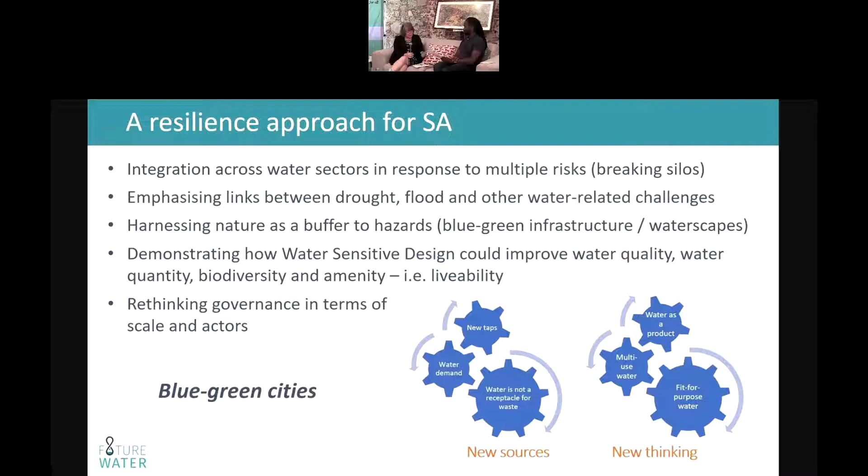Water-sensitive design in this case is the process - we're talking a lot about process today. It's how we put in place the resilience-building initiatives for a water-sensitive city, and the water-sensitive city then becomes your destination. So those processes and the approach of water-sensitive design are things like diversifying water sources, bringing in sustainable drainage elements so that you have that green infrastructure that starts protecting buildings and roofs and roads and that sort of thing.

You have things like naturalization of waterways, using nature-based solutions for the treatment of waste, recycling waste. Even things like water conservation and demand management form part of the approach that is water-sensitive design, because it starts to consider all those different aspects of physical infrastructure, the governance arrangements, which we've heard about from Sebastian already, and obviously social engagement, which is so important.

In a moment, we'll speak to Tamsin Faragher, who's the Principal Resilience Officer at the City of Cape Town. How does academia help the City of Cape Town in realizing a water-sensitive design city?

Yeah, so I think our role - academics have three main roles. One is research, obviously teaching, and the other is what we call engaged scholarship, or sometimes social responsiveness. And it's in that space that we really do have an influence across stakeholders, not only local or national government, it could be in business, industry, with consultants, and with residents. So what our privilege as academics is that we're able to zoom out to a space where we don't have to concern ourselves necessarily with the day-to-day operations and management and even maintenance of this sort of water-sensitive design space.

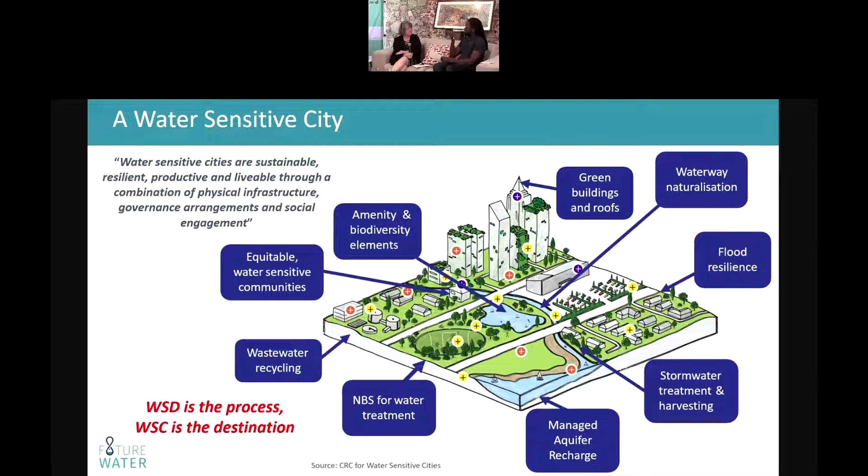The previous public protector, Professor Thuli Madonsela, coined a wonderful term where the primary part of her work was responding to the needs of Gogo Dlamini. She almost instilled that image of an ordinary South African who lives, hopefully pays taxes if they're earning income, has a healthy life, and that kind of thing.

How do we involve the Gogo Dlaminis of this world in this conversation and process? It's really important, and it's not easy, because often government tends to do things in a top-down way, using the regulations, policy and knowledge they have to impose certain ways of doing things. But if we want to transform our cities from where we are at the moment, where they really are only providing water supply, sanitation, and sometimes drainage services, to that more visionary space we call a water-sensitive city, then that point of transition is going to be where people are involved and understand their impact on the water environment, and what impact the water environment has on them.

Without that, we're not going to be able to transition into a more water-sensitive space. So some of the work we're doing as part of Future Water is that we lead a community of practice program in water-sensitive design, with funding through the Water Research Commission, where we build awareness, do a lot of training, knowledge raising, data management, and have websites—we connect with people on a very broad level. But apart from that, that's the training of your average stakeholder, the ones particularly invested in doing water-sensitive design.

I mean, if we recognize, as Kirsty and Tamsin have said, that no settlement, towns, cities, we can't exist or function independently of Earth's natural systems. And so Earth's natural systems, obviously your groundwater, surface water systems, your biotics, your plants, animals, insects, what have you, your climate systems, and many other systems that this is the Earth, this is what we live in. And once you recognize that we are dependent on these natural systems, I think we especially in the last few decades, we've engineered a lot of these systems out of our cities.

And I see in landscape architecture in particular, it's almost retrofitting it back into the landscape, into the urban setting. So you've got things like your stormwater piping, which is a definite engineering to reduce the flooding issues because everything is covered in impermeable surfaces. So the simplest thing is to increase your permeable surfaces at every opportunity. But you're not taking away the stormwater system, you're just trying to now intercept and create infiltration opportunities. These can be big scale, but often they're very small interventions.

For instance, the one that we've got on the screen at the moment is Durham Avenue, which we did. So it's Woodstock, Salt River area. And you know Durham Avenue probably is a fairly broad street. Correct. And the opportunity arose for us to create an intervention. The stormwater before the intervention would just run off to the edge, straight into the stormwater pipes underground. And all we did was, because the parking is at an angle, which is very useful, we could create a portion of that parking space, or the space in front, into a planter, infiltration.

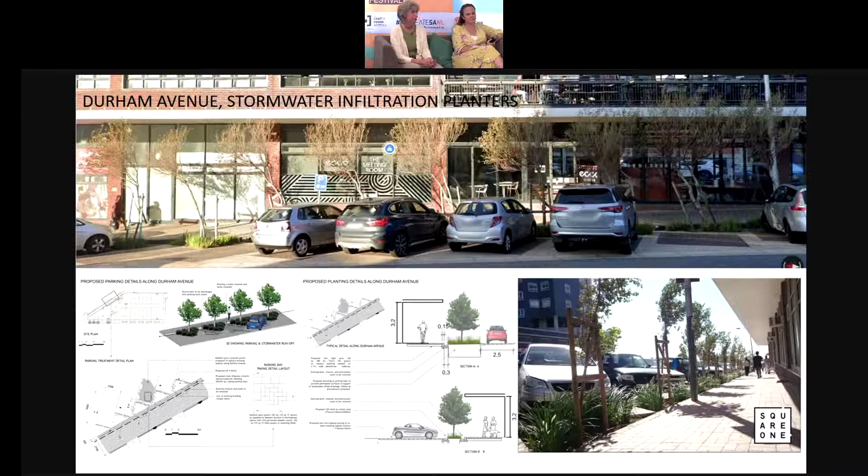Once you communicate your objective and vision, that's got to be very clearly communicated, whether through images or drawings that show ultimately what your vision is. Then you get buy-in, especially when people find out the benefits. It's not just about the water systems, it's about amenity and how it could form enhancing spaces.

One of the projects we did was this Woodbridge Island stormwater infiltration opportunity. The idea was to take the surface water runoff from the car park, a very small intervention with planting, and in the drawings we show a depression. The water would flow off the surface of the car park into these planters and be slowed, filtered, treated, and infiltrate the groundwater. But what was interesting was when the contractor came on board and did it very quickly, we found they'd gone and done a fairly normal planter, which is raised. So it had to be rectified, following the drawings.

What I'm trying to get at is that our everyday vocabulary does not yet reflect a general understanding of these systems. To most people, stormwater systems, as my colleagues have mentioned, are about removing stormwater as rapidly as possible from a settlement. That's becoming a challenge. But I think gradually, through demonstration projects and something as simple as signage to illustrate, those things can help.

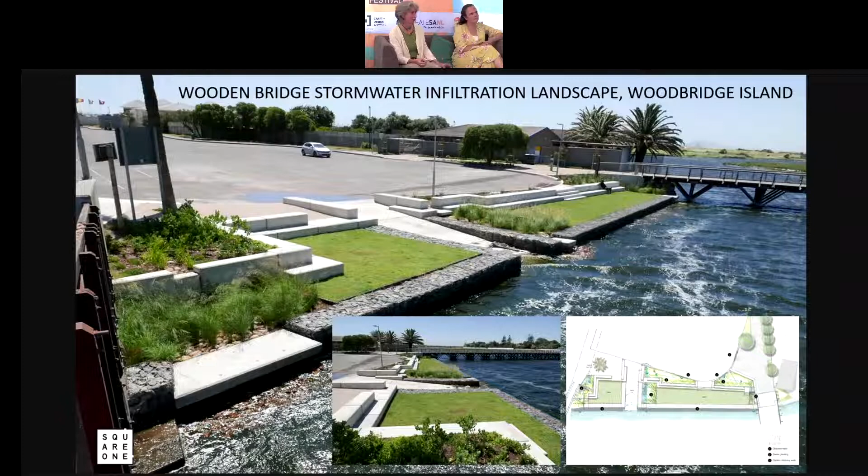You mentioned Durham Street in Salt River, and of course Woodbridge, the stormwater infiltration project. Are there any other examples of success coming from the sector? Globally there are many, but I'm trying to focus on local projects. The numbers are growing in South Africa, but one I'm most familiar with, and Tamsin works nearby, is the Standard Bank Towers.

It was an addition to an existing building, with a large plaza out in front. With this additional car park structure in the center, the idea was to integrate the building and the landscape. So the new building is intercepting rainwater, catching it and harvesting it in tanks at different levels. But any overflow, because you're going to have significant storm events, goes into an infiltration basin. So the planter isn't a raised planter, it's a depressed planter. With this blue-green approach, you're reducing the pressure on the stormwater system, but you're also infiltrating the ground to recharge the groundwater.

But it's not just about water systems, it's about water systems as space. In this area, we took the opportunity to include spaces where people could gather, sit, have lunch, meet friends, and so on.

That's pretty, it really is. I like having coffee there. I walk it often because I go to the Artscape Theatre Centre quite a bit. I know a number of people who work at the City of Cape Town, and that's literally our meeting spot almost all the time.

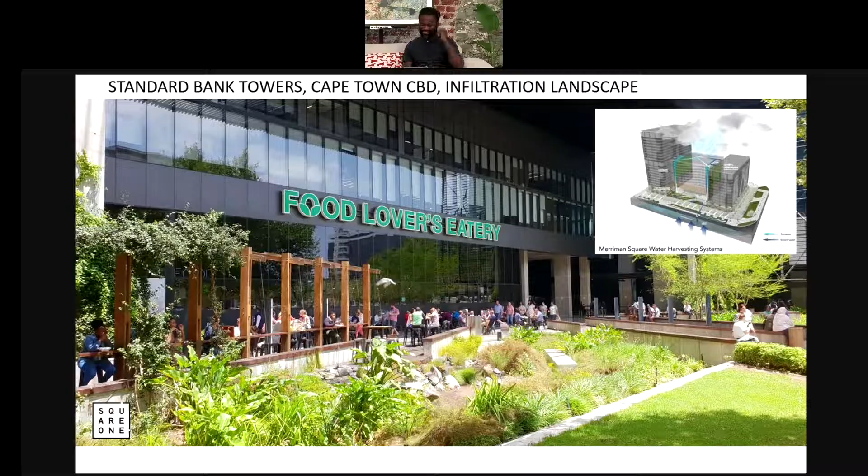Let's move beyond just the City of Cape Town, and more globally, particularly on the African continent, how do we translate many of our African cities into water-sensitive cities, do you think?

I'm not sure I can answer that very easily, but I think certainly from a landscape architect's perspective, it's the traditional view we've had over decades of stormwater being piped. We have to change our minds from stormwater being discharged as rapidly as possible, to one where stormwater is an asset, a resource.

So how do we do that? There are so many examples. I'm referencing places like Benin City, going back to the 1500s, 1400s. There was rainfall there, but what did they do? They had courtyard houses where they created wells that would intercept water. Simple interventions that don't require piping, obviously checking you don't have much contamination.

One of the most beautiful spatial typologies, sorry, getting architectural, is the stepped wells of India. We were talking earlier about innovation. Something as simple as an inverted step pyramid going into the ground to access groundwater, which would fluctuate seasonally depending on the season. These spaces have been designed, they've been crafted.

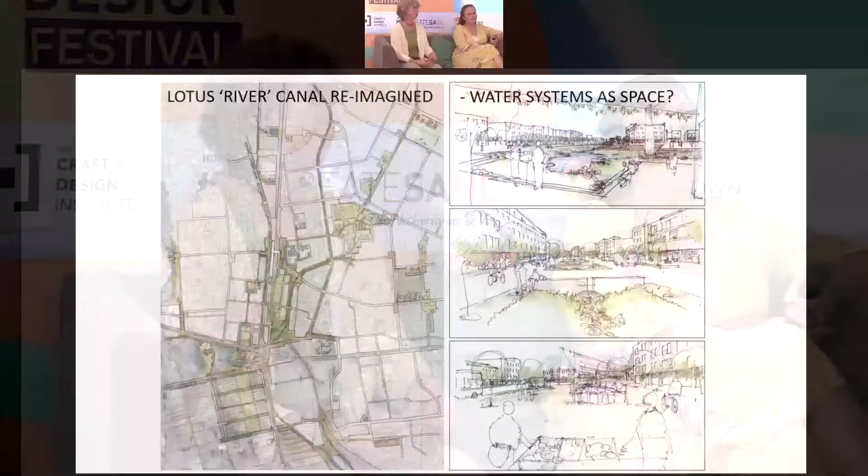But what if we could have the Lotus River Canal, essentially a large stormwater channel that drains water from Cape Town International? What if we could articulate water systems as urban space, as food production opportunities, as sacred space, as recreation and amenity?

Rather than, at the moment, what we have is we've turned our backs on them, and we don't see the value. But if it's just about realizing those opportunities these systems can provide, I think there are ideas and innovations across Africa. If you look at some of the projects going on, sometimes it's about learning from the past.

That would be helpful. Very much. I'm going to throw one more question to you, which I didn't prepare you for, I'm afraid. Yay.

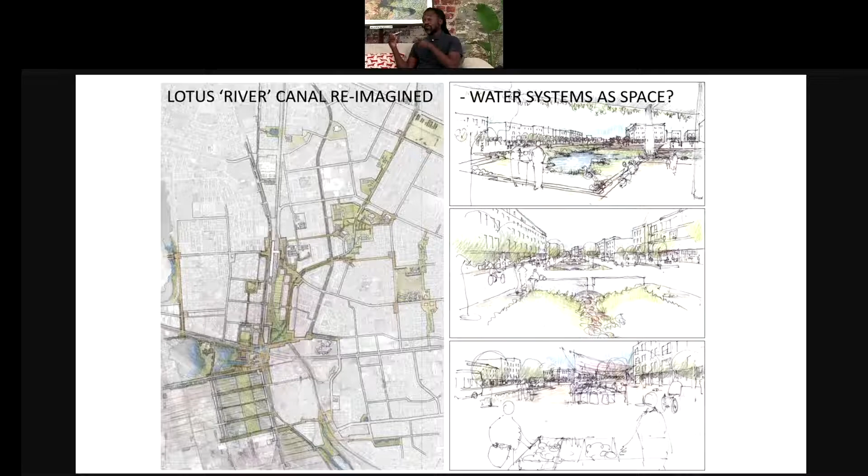When we were thinking about energy and how we can reimagine spaces we consume in an energy efficient way, the early adopters were paying an exorbitant amount of money to bring in this innovation and technology. The more people took it up, the more cost sensitive it became. People would look at that and think it might cost them a ridiculous amount of money. But it sounds like the small interventions you're talking about won't cost an arm and a leg, it's about rethinking and reusing the budget you have to reimagine and repurpose the flow of water.

Yeah, and often it is about talking to clients, developers, city officials, and getting their buy-in. Once you can illustrate, whether through pretty pictures or otherwise, that does help. So there is innovation required in that regard too.

Tamsin, you're excited by this, surely, right? Oh, yeah, it is reimagined though. At least you have one ally, the 26,000 force of the city of Cape Town. Same thing, that's exciting thinking.

It is very exciting. Just to add to what Julia's saying, what it will require, the costing thing has largely balanced out in terms of what you're able to do from a stormwater flood prevention perspective. What can be quite difficult, and it comes back to governance, which we talked about at the very beginning, is how to govern these new systems in an environment that isn't really prepared for them. So maintenance becomes tricky.

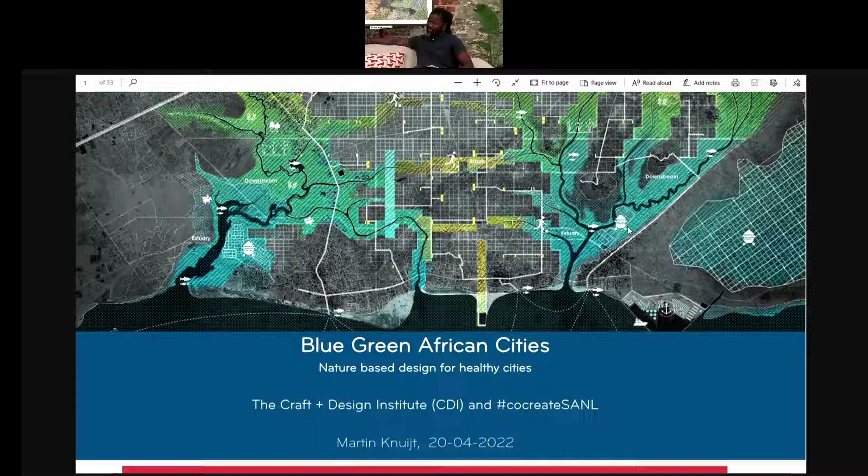I'm happy for you to start showing those examples. You should have the indicator, because I also want to focus on success stories in innovative design in this sector. Well, I hope this is working. It is? It should be, but I'm not really good at operating these machines. So we're still at slide one. Just to tell everybody, we tested all of this before 2 o'clock and it was all working 100%. So as with everything else in life, we're going to blame it on Eskom and load shedding - it's the only reason we're having these challenges that weren't here five minutes before 2 o'clock. No, but it's not about the machine, it's about human error, it's me.

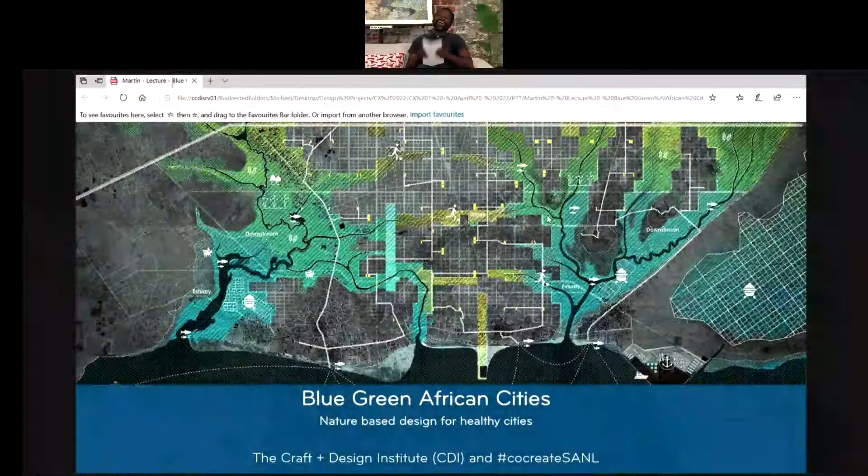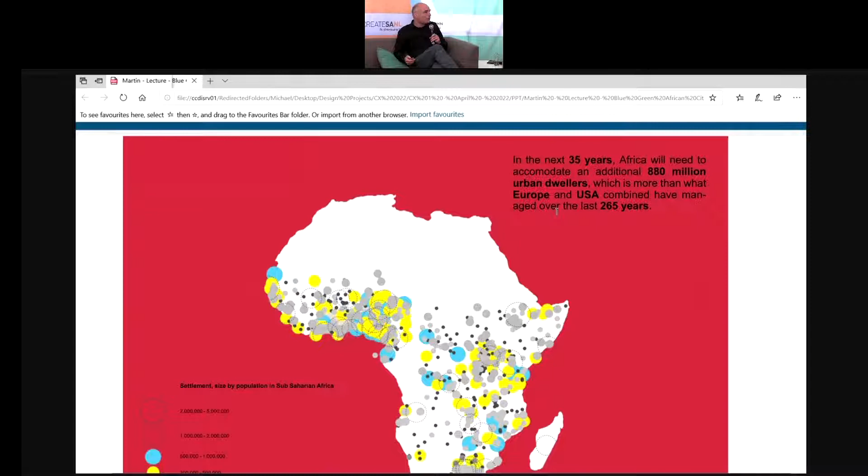Talking about African blue-green cities, I think the challenge in Africa is really massive. If you talk about the expansion of cities, it's more than what Europe and America saw over 265 years that is now at stake. So if we want to create blue-green cities, we need to acknowledge this is the case in the coming years. In Africa there's also a special challenge since 50% of African people live in informal cities, so these nice European examples don't work in many cases - let's say only in half of the cases. There's also a change in the amount of energy and nutrients used when we construct these cities. At this moment, the whole African continent is only consuming the amount of energy that a small country in Europe uses.

And that's an advantage, right - the fact that, unfortunately through socioeconomic challenges, we're consuming minimally? Yes, in fact that might help find appropriate solutions. Once you acknowledge this is the fact, and that there's an opportunity and not just a threat, this might lead to innovative solutions coming from Africa that Europeans can learn from. I think that will be the case in the next decades.

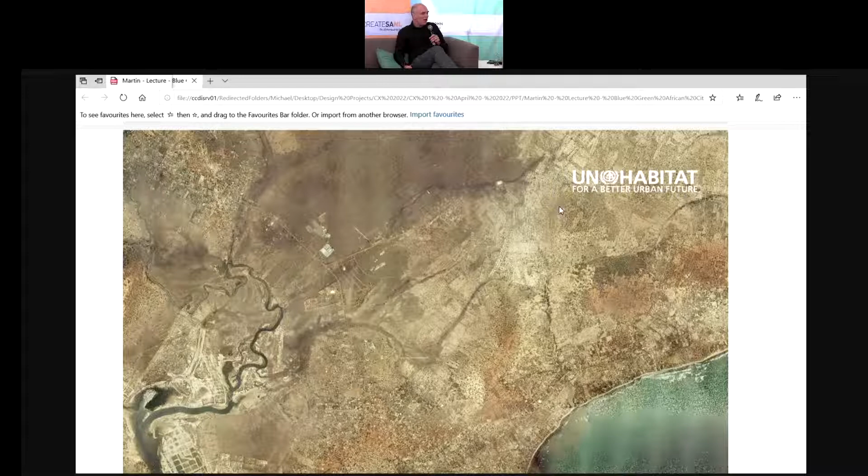And the idea was that it should tackle some problems with flooding. Now you have today the really terrible situation at Durban, but in Accra it's happening every year. Let's say 20 years ago it was every 3 years, so it's occurring more often.

And once these floods take place, there's also fires because the infrastructure is collapsing. And if you talk about social aspects, the poor suffer the most. So it's almost incredible that you see this picture, because it is happening in areas where people don't have a thing.

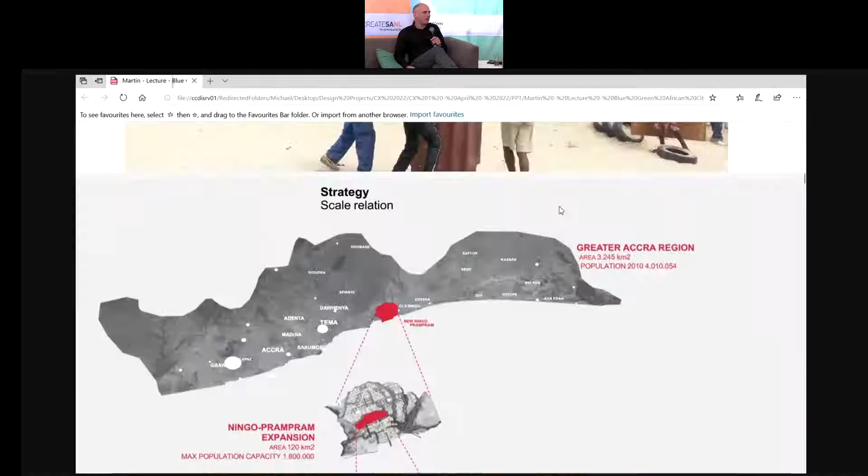Well, that was a reality for us in Cape Town this past weekend, where the official figures now are 767 people were displaced as a result of a fire that took place in an informal settlement called Joe Slovo, which is literally less than 10 kilometers away from where we're sitting right now.

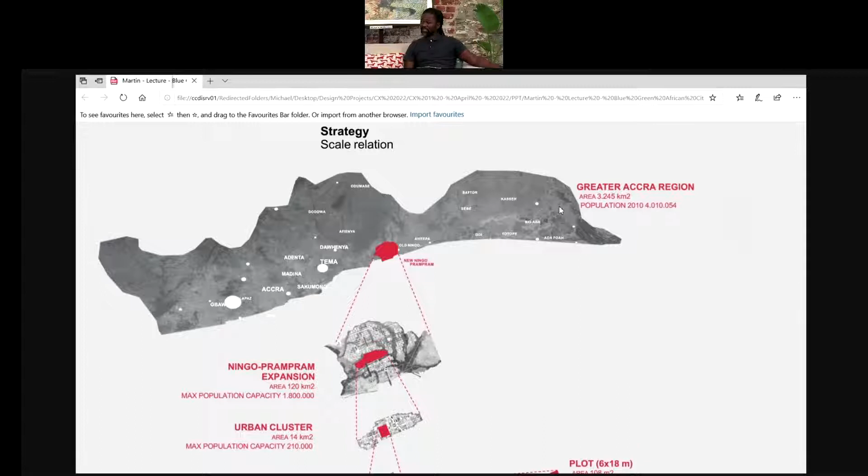Yeah, and in fact it's also related to flooding. So you think it's a fire, but in this case all the infrastructure is damaged, the underground infrastructure, and then a gas leak or a pump station or something else might happen, and then suddenly you have a fire as well. So it's an accumulation of threats taking place.

Now I'll bring you to the area. It's called Ningo Prampram. It's just open land, but if you look at it on the map, you would say it's almost flat. But in this case, it looks a little bit like the Cape Flats.

So we decided that you should not make a grid like the people from UN Habitat usually like to propose, but we said, well, let's start with greening. So couldn't we create green spaces along these rivers, watersheds, and what you call in Northern Africa wadis—which is, let's say, a potential biosphere.

And then if you talk about the informal settlements that will occur—of course, even in the planned city it will occur—then you need to think about what could be a potential programming of these green spaces. Because it's nice to have green spaces, but if you go to the Cape Flats, green spaces are under threat.

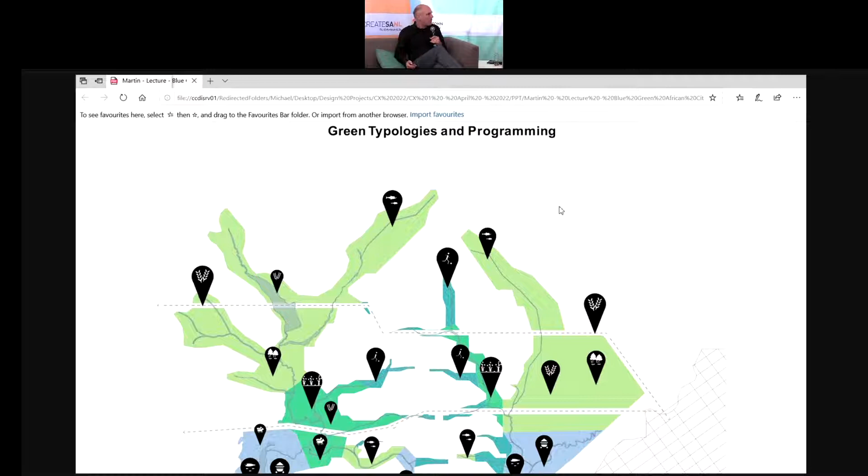So we decided also to make these potential agricultural areas, urban farming, and then work via some typologies on what could you do close by the sea, what could you do a little bit more downstream, and what could you do upstream, because the situations are different.

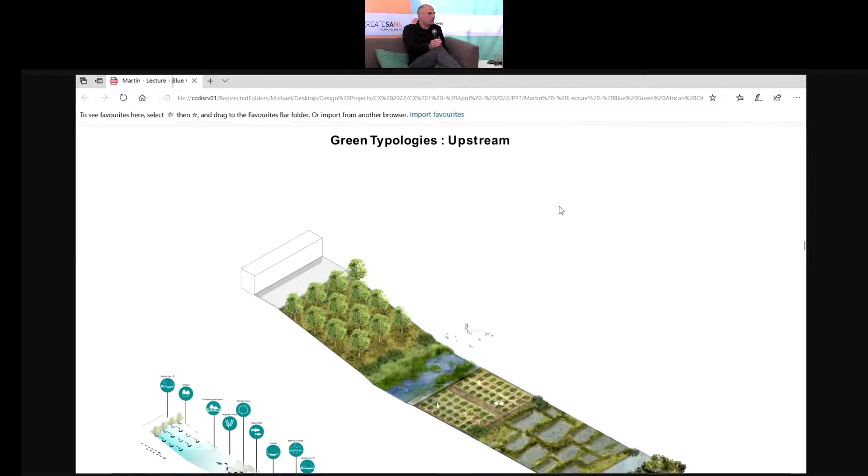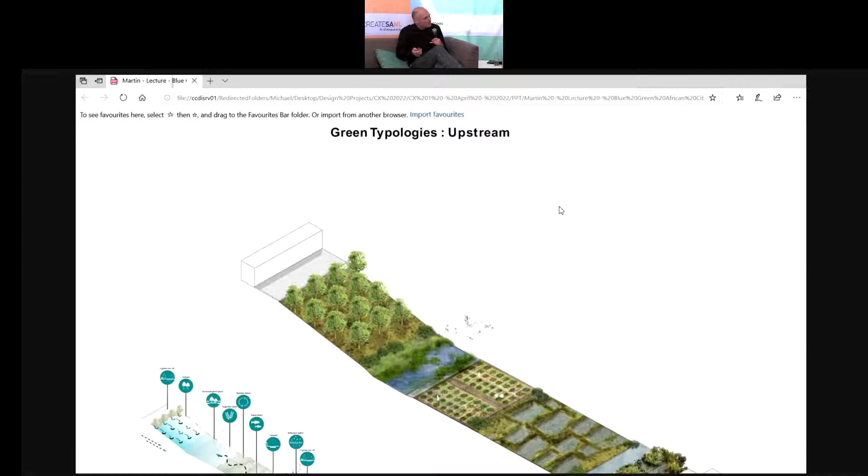And then these are just ideas on how could you program these green spaces—maybe there can be fish ponds, maybe there can be just small urban farming, maybe there can be in some places also sports fields. So things that people can imagine, not that I can imagine, but that people can imagine.

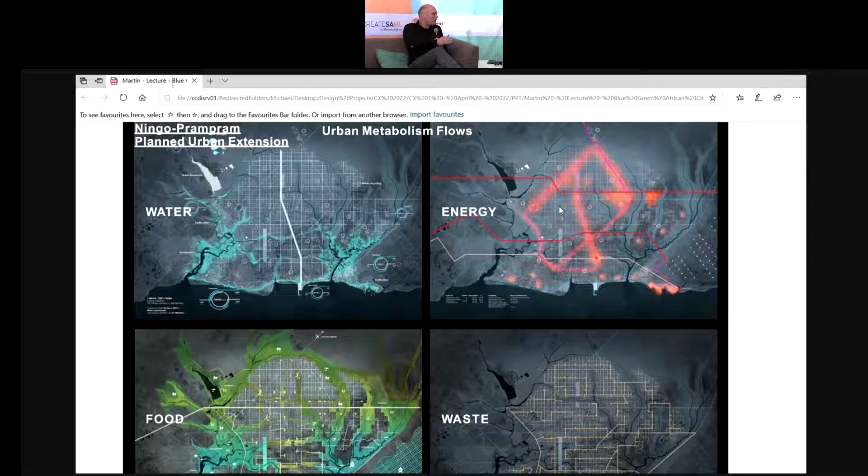And eventually, as planners, you can say okay, then we have a circular system. So we have something on water, we have something on food, on waste, and on energy. On water, of course, that's in this context the most important. It's about thinking about how the system might work.

So there's always what we call a watershed—the difference between one water system and another system. And if you think of the history of cities, this is most of the time where the high streets or the places where churches were built, because it's the highest ground. It's always safe.

That's clever. I didn't know that until now. Oh yeah, people in the past were more clever than we tend to be. That's of course, they had the favor of just the opportunity to select their places. That's a Trivial Pursuit question, guys. Yeah, well, learning from the past in many cases helps.

Yeah, I think here in Cape Town there are underground rivers. Or now they're underground, but at one moment they were above ground, there were canals. It all has vanished, and I think if you would talk to Kirsty, she could explain the scientific meaning of that, and if you would bring it back, what potential you would have. Yeah, we can learn.

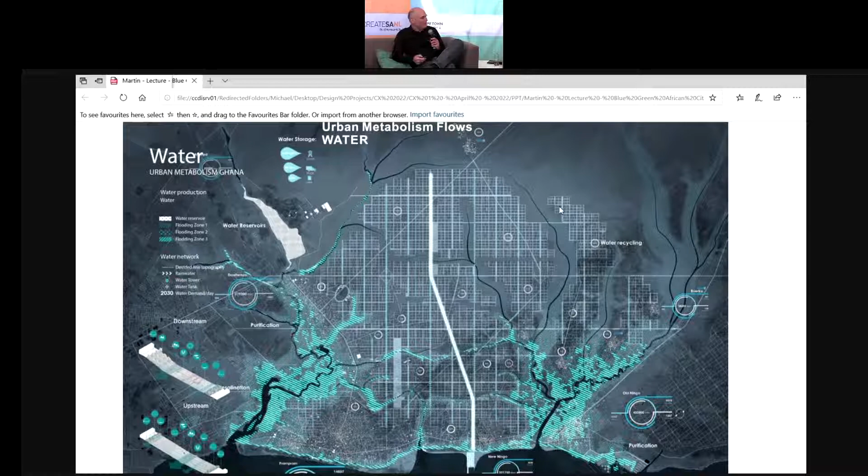Talking about food, in many cases in Ghana, but also here in South Africa, in Cape Town, there are organizations—I think here it's Abalimi—who actually produce food locally. Mostly women are working hard on urban agriculture to produce food and make something for families and local communities. That's the potential of these spaces.

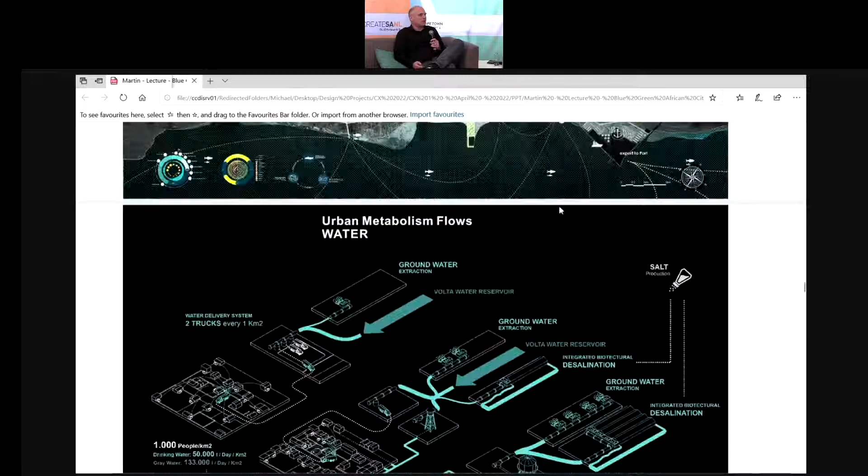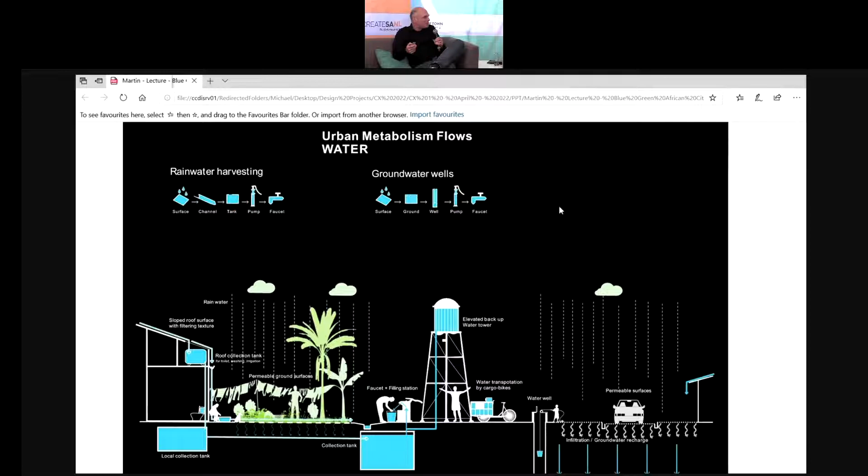This is more technical: how it flows down to the neighborhoods, and how you can distribute the water you collect at the home towards the system, bringing it in normal doses to the rivers and streams. What's nice is that at every scale things could work. At the home you can collect water from the roof, at the street you can collect water in small places like in Julia's examples, and then of course you could have the big system. It's all interlinked—one thing doesn't exclude the other.

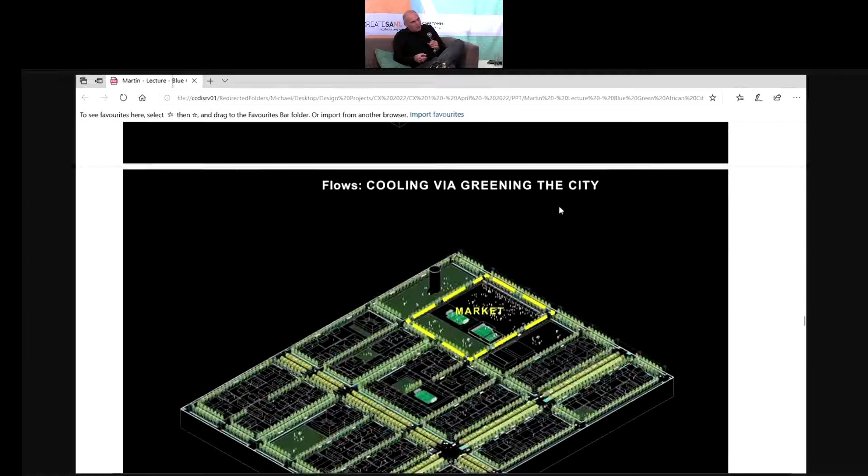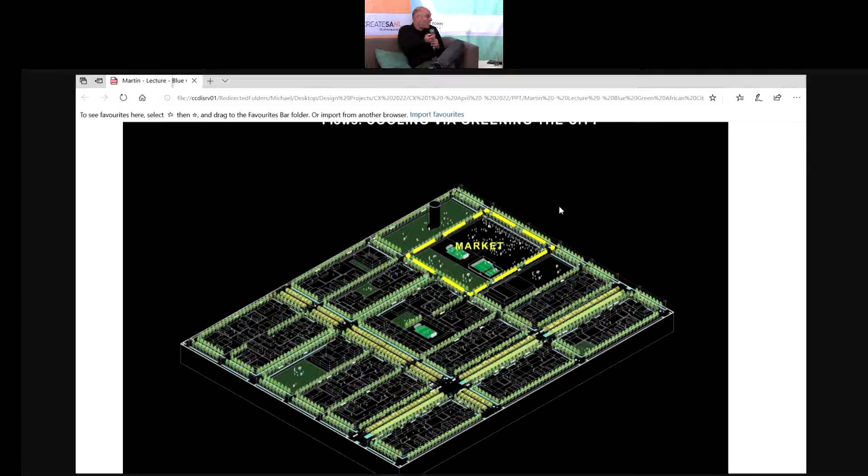Here you see it in a systematic way. If you plant those blue spaces with trees, you also get a big cooling effect. Unfortunately, here in the Cape Flats there are not many trees. It's a kind of social injustice that trees are apparently for the rich parts of the city, while in other areas there is hardly any tree planting, which makes those places hotter on a day like this.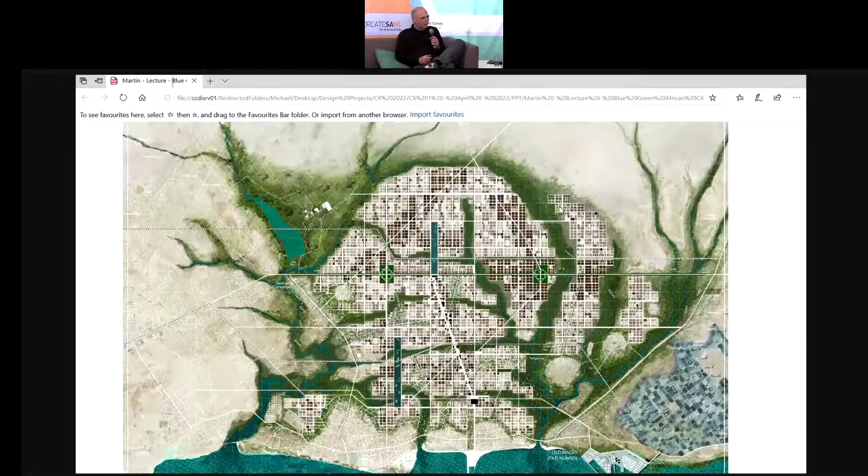This is the shading that could work on a micro scale. Here you see the plan—it looks like a strange plan. The man from UN Habitat, the project manager, had to think about it a bit at first, because normally they just make grids, and this looked like a strange cauliflower pattern. But we explained that these would be neighborhoods of about 60,000 inhabitants each, which creates a big city—and then you also have the city for the millions. So even big cities should not be planned from scratch, but planned with the landscape, I would say.

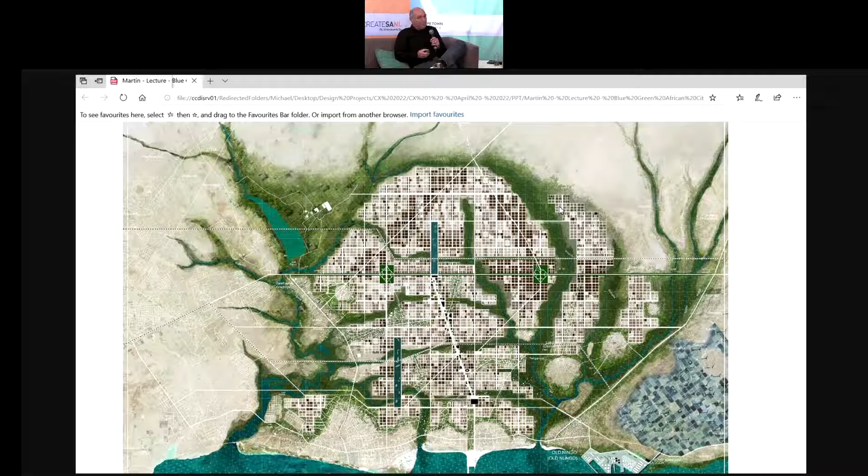Now we move to Khayelitsha. That's the second project I would like to show. Together with RCDC, Luffen and Nathan, we have been working on a place—this is a school premises.

Initially, we talked to somebody in Cape Town who said, 'Oh, but there are nice school places in the townships, people have places to play, etc.' Well, it's just sand, but it's fenced, so this is a place where potentially you can do things, since there are no buildings apart from the school buildings.

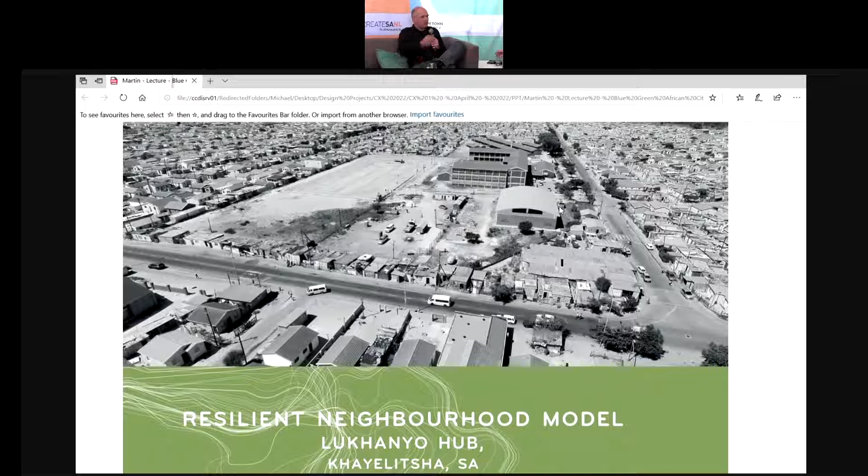The idea is to create a kind of green hub—sports fields, gardens, vegetable gardens in this case, playgrounds, and an early learning center. If we could manage to do that, there's a huge potential, because only in Khayelitsha there are already 56 schools, and if you count the number of schools in the whole Western Cape province, there's a huge potential. The nice thing is that this is something the community could do—it links to Julia's story, that you could do things on a small scale.

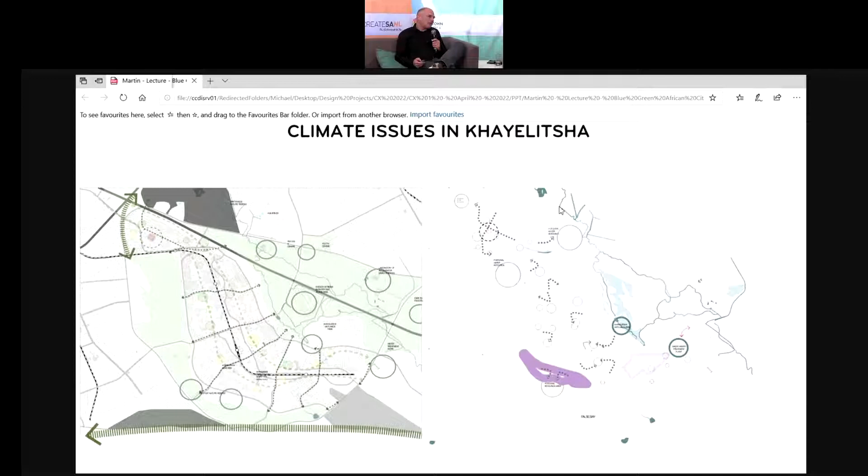Of course, we also drew a map on the larger scale first, since if you talk about climate issues in Khayelitsha, there are these wetlands around the neighborhoods. I talked to people, and they said children never go there—children don't know what nature is, even if it's close by, because people struggle so much to survive that even the nice things nearby are hardly recognizable. That's a pity, so in the end it's also a change of perspective needed for children there.

And of course, we are planners—we do this in this kind of toolboxes. I'm sorry for that.

We don't want to punish people, but it's about water tools. First you try to collect the water, then recover it, harvest it, reuse it, and in the townships, also enhance efficiency.

People are already efficient, but let's say the pipes of the school are leaking, toilets are leaking. If you could repair that system for all schools, somebody calculated that in one year you could build a school for that amount of money, just by fixing the pipes.

Of course, circularity, green structure, climate comfort, but also social values - the educational purpose, but also boost of interaction.

And to talk about water, if you think too big in this area, it will not work. People are really trying to change things, but you need to be capable of change. So first we started with a small tool.

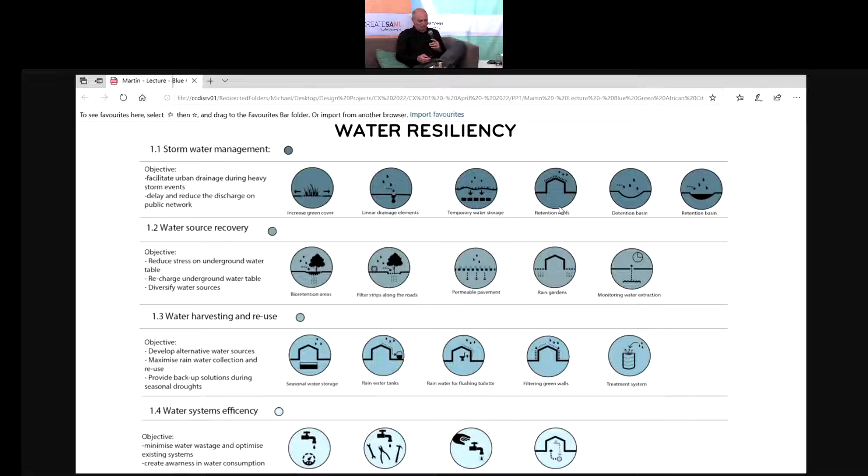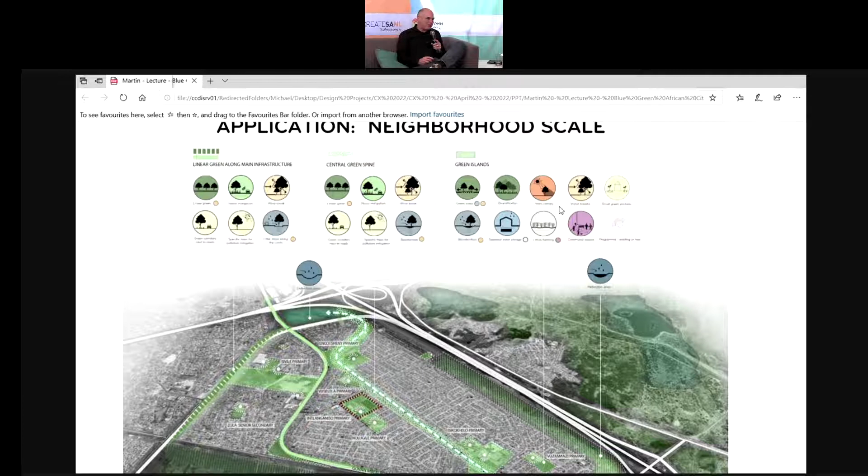Here are some tools we identified for that area - the area that is just in the middle of the picture down, with this black square box.

Then we said, well, okay, what can we do? We can collect water from the roofs, bring it to a vegetable garden. There can be a sport pitch. And in the inner patios, we can also collect water and plant some trees.

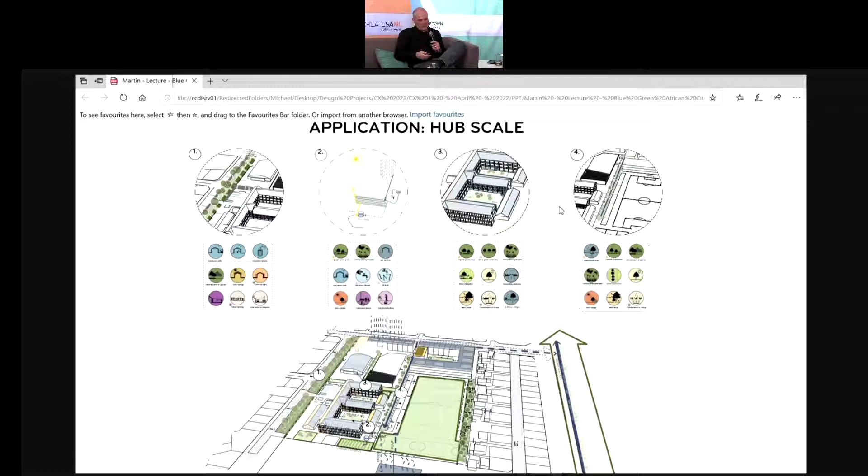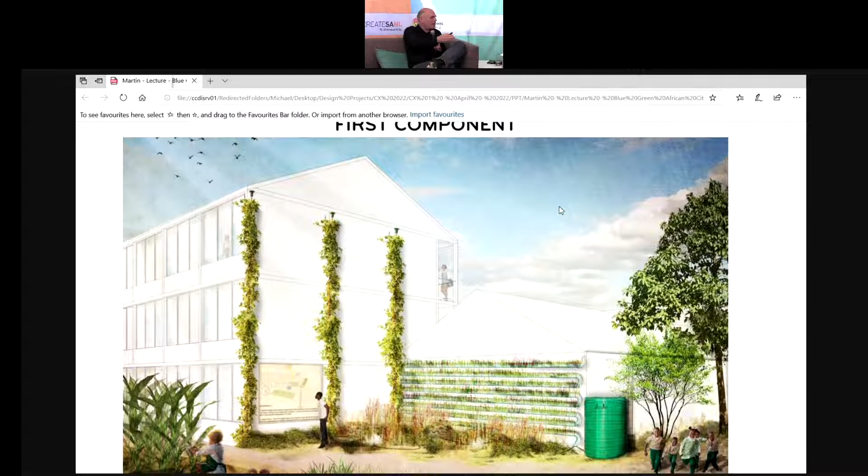And then we can create maybe a small corner where, with what we call in very difficult words, aquaponics and hydroponics, we can actually bring down the water to the garden, have some plants in the wall, collect the water, and have the vegetable garden running. And then it might work.

In this case, it's not just theory, it is also practice, because there is a vegetable garden, and it is embedded in the local community. I think that's important. The real hero is the man on the left, that's Jeremy. Jeremy is maintaining the garden, and he has respect, so people believe his words.

He is also the man who is very patient and working on it already for 5 years. And the fact that it will work means that there's somebody like Jeremy who cares about it and who tries also to educate children. There were some 10 children helping for a year on it. They got a diploma, a small course for agriculture from Abalimi, and they start to love growing vegetables.

There are also some trees, they are not on this picture. Sebastian planted the first one, a coral tree, and we're really grateful for Sebastian to do this. And it's still growing, right? It's still growing - I didn't do that bad a job.

At first it needed some water, but Jeremy was taking care of it, and then after 3 years it's really growing from itself. No, that's amazing.

Thank you for bringing such a practical example of what is happening on the African continent and bringing it close to home where there would be opportunities. Because the challenges that Africa, the continent, faces are quite unique. And as you said earlier, from those challenges - why waste a wonderful crisis - you can bring about innovation and lessons that the rest of the world, including Europe, can learn from us.